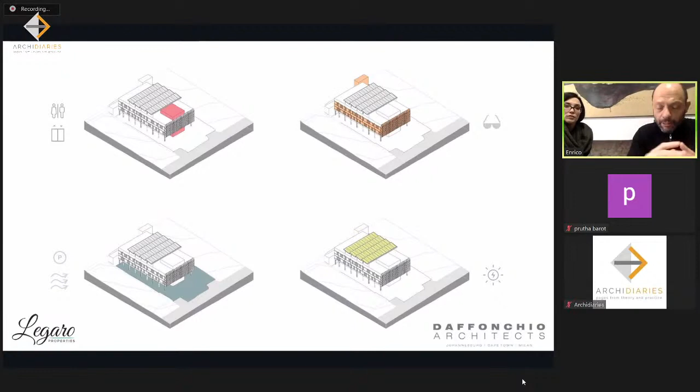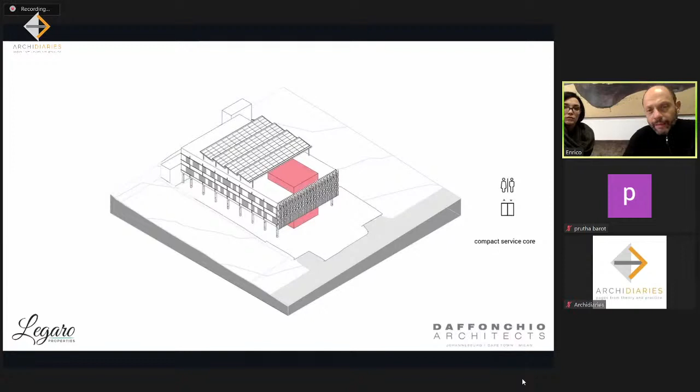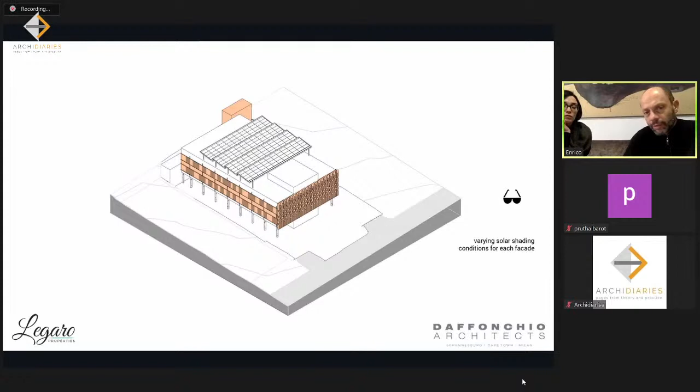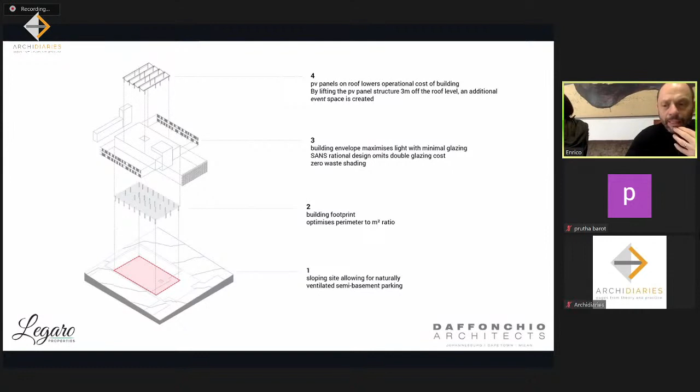When we managed to have some budget for green technology, we invested most of it in the solar panels you see on the roof, and in a special type of louver on the north facade, which allows natural sunshine to come in winter but blocks it in summer. We also used movable louvers, moved by hand, on the east and west facades. We specified taps and sanitary fittings that save water. There are some other smaller technologies, for example monitoring of electricity and water usage, the introduction of landscaping on the site, and various other things.

You can see how simple and efficient the floor plan is.

And we think we actually created an attractive building that has pulled very high-paying customers, and therefore has achieved its commercial goal, while at the same time being rated the highest rated building in the country. So this is one example, and it's quite a simple approach, and it was quite an intentional approach from the client, starting from the client giving a brief to us of achieving these ambitious goals, and then us together with the client realizing them.

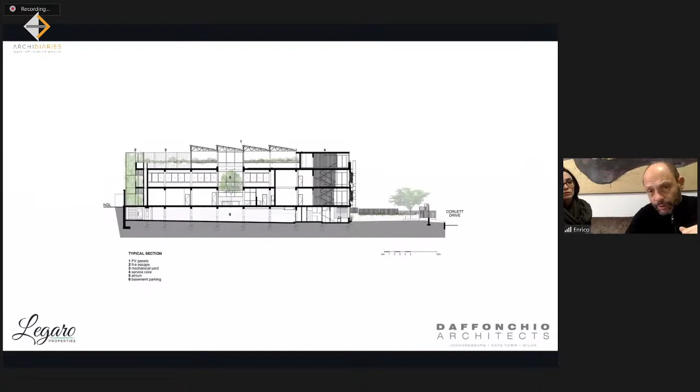The section of the building shows how the core of the building, for example, acts as a light well, and that light well minimizes the requirement of artificial lighting during the day, and helps the natural ventilation of the building. And so on. So the other example is a building called the Bank.

Rosebank is a high-rise building in a very busy area in Johannesburg, and it's interesting because it's a very different approach. This building resulted in a very sustainable structure, not because the client required that at the beginning, but because specific commercial decisions were taken that resulted in technical choices which were then green and sustainable.

And this is very interesting, because the same way that nature finds the most efficient way to build things and run organisms, it seems that the economy is moving towards a place where efficient commercial decisions align more easily with sustainable decisions. And I think that is extremely interesting.

We didn't have a brief to design a green building in this instance. The green building happened because certain hard commercial decisions were taken, and we interpreted them in a kind of sustainable way, and the client was actually happy in the end to go in that direction because the cost was not higher. So I think it's quite a different approach from the previous one.

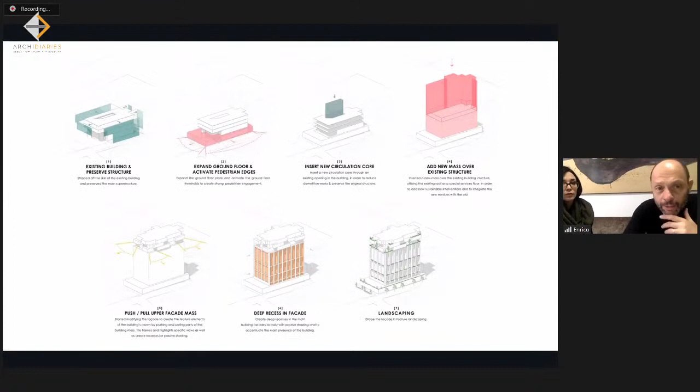This particular building was, at the onset, you see the top left, an existing structure. Maybe I can find the picture of the existing structure somewhere. It's not there—okay, no problem, let me go back to the beginning. It was an existing structure, a bank originally built in the 1980s.

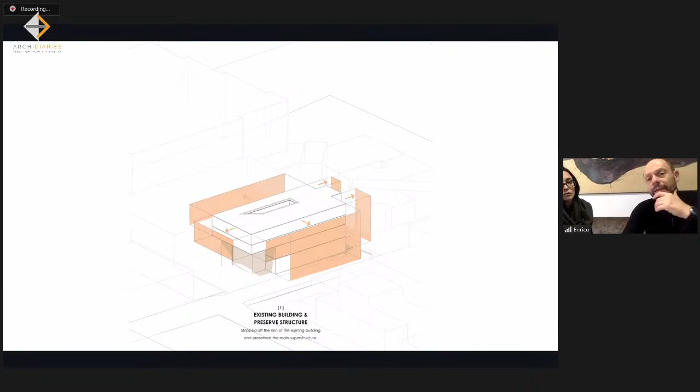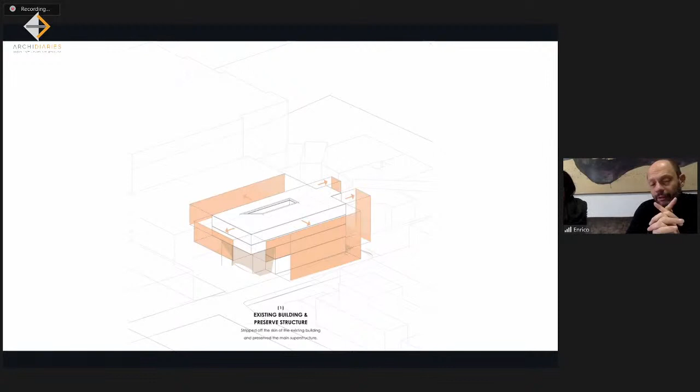A 4-story building with 4 stories of basement. There was a lot of debate at the beginning of the project about demolishing this building and the entire basement, going deeper and coming out with a high-rise structure. That turned out to be very, very costly. So the first commercial decision was to actually retain the basement and the building and build on top of it and around it, which was technically extremely difficult.

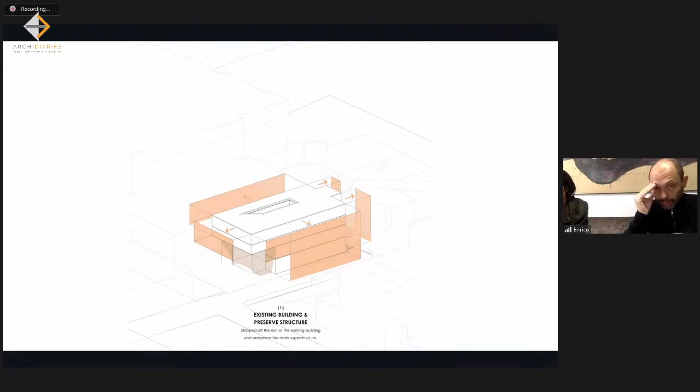But besides saving a lot of money, it turned out to be an efficient decision from the point of view of sustainable design. And we retained all the structure, all the embodied energy that was there.

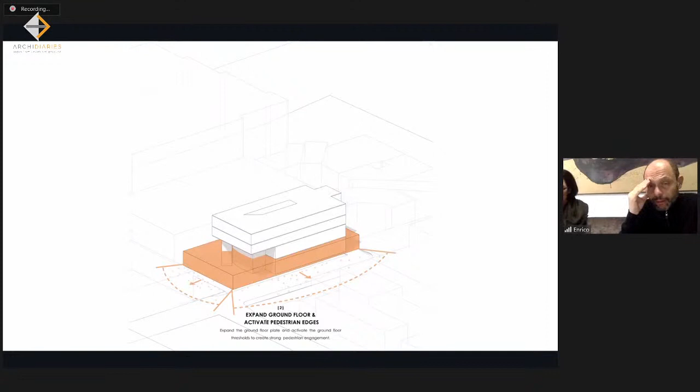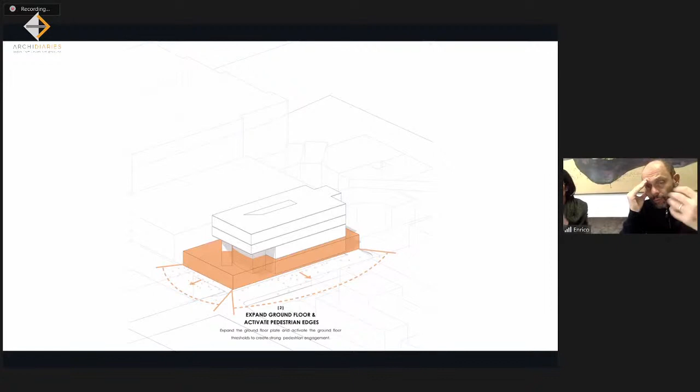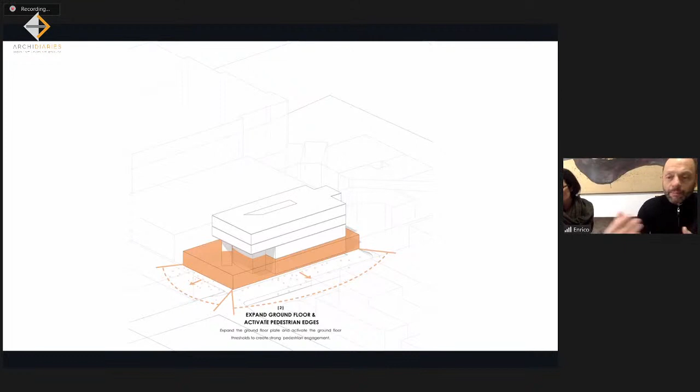We then expanded to connect the building better to the surroundings. By creating this retail floor, we proposed to the client to reactivate the street and the piazza in front of the building, which were quite run down and inefficient areas. To do so, we reinforced all the landscaping, introducing more planting and more natural presence in the street interface, which in turn benefits the retail. It is a good commercial decision, but also a good sustainable decision.

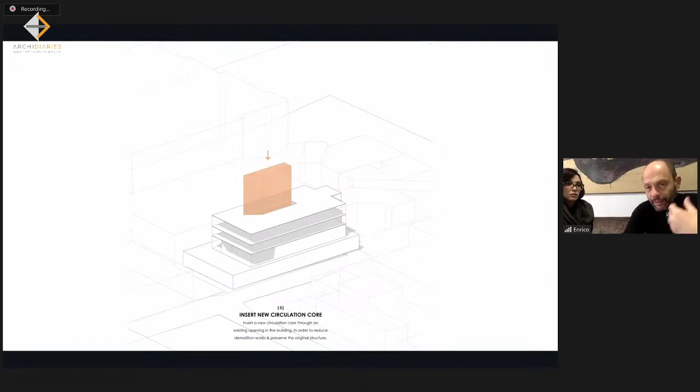We then used the existing atrium in the center of the building to run all the vertical circulation of the new extension. So we didn't core, we didn't use energy to core, we didn't take concrete to landfill. We actually just went to the structure that was there and used the shape that existed to create a new vertical circulation.

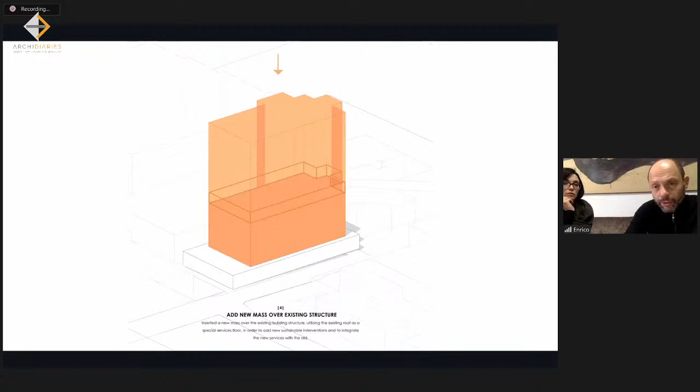Then, after reinforcing the structure, we went up with an additional 8 stories on top of the old structure. These 8 stories contain a variety of programs: a restaurant, retail on the ground floor, co-working spaces on the first floor, and a hotel and offices.

Now, the advantage of this very articulate mixed use is that it makes the building counter-cyclical from a parking point of view, so we didn't need to construct more parking or dig deeper for more parking in the basement. It also makes the use of electricity counter-cyclical, so there's not a huge demand of electricity.

The electricity in Johannesburg is a major problem due to historic problems with infrastructure. So we didn't have enough power for this building, and this resulted again in a solution that was economical at the same time, effective from a technical point of view, and quite green from a technical point of view.

That is, we used the existing relatively small electrical connection that the original small bank had on the site. We added a tri-generation system, which with the wasted heat creates a heat exchange for air conditioning and heating water. So we generate hot water, air conditioning, and electricity with one machine.

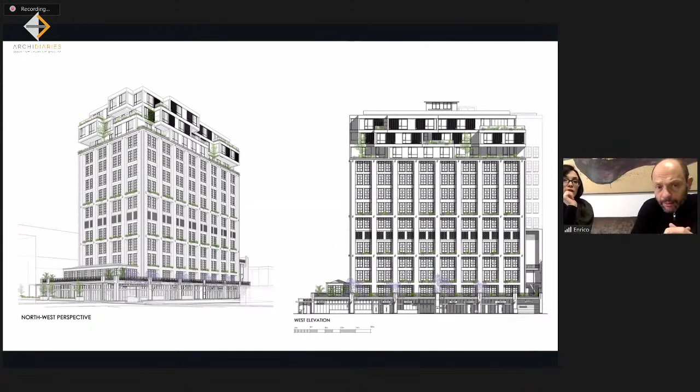And then we covered every possible horizontal surface with photovoltaic panels. So these now respond to the power requirements of the building, while being, of course, a sustainable choice.

So here we're looking at a structure which is commercially successful. It's attractive, it's fully tenanted, it uses very little electricity. It incorporates water saving taps because it is a good commercial decision, and it incorporates electricity saving technology because it was a great commercial decision. So I think it's a very interesting case of how economics align spontaneously with sustainability.

And that's really the end of the story, and thank you for listening. Hope you liked it, and if you have any questions, please shoot. Thank you, Enrico.

Thank you for your presentation, Enrico. And when I actually received your title, which is the ethical aspect versus the business case of sustainable architecture, it was really thought-provoking in many ways.

And when I looked at your projects, I could understand the connection that what you, as a concerned professional, are trying to, on one hand, understand the larger issues of the environment.